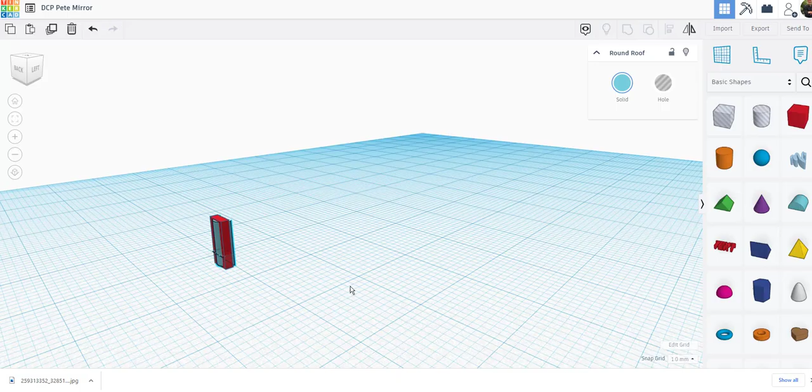What I think I'm going to do here, I'm going to take this blue object, duplicate it, and then move it out. I'm using the arrow keys on my keyboard to move that object. Then what I'm going to do is turn this blue object into a hole.

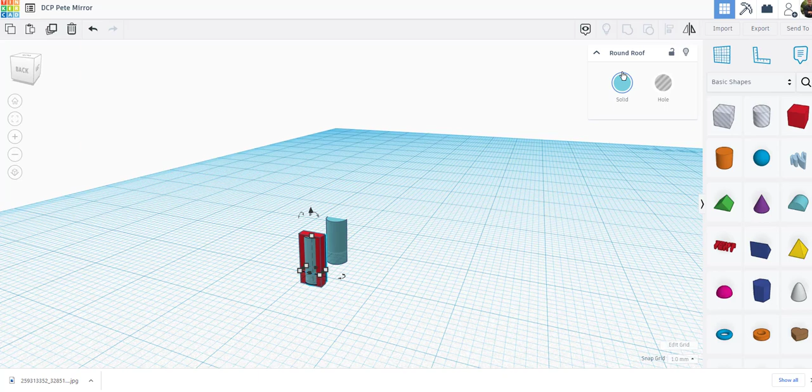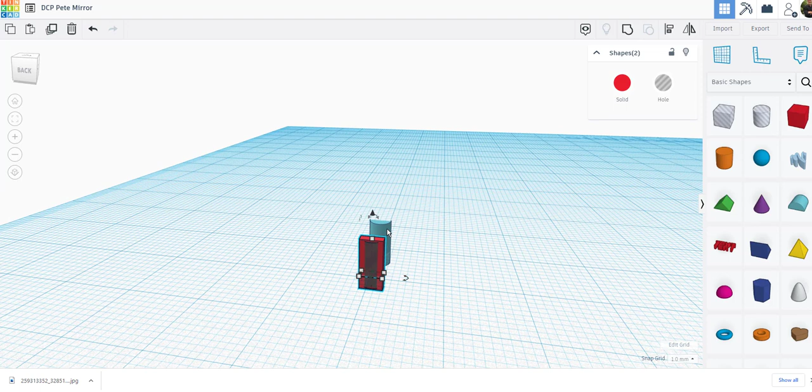Now why would I do that? The way you delete spaces on objects is to turn another object into a hole and then join them together. So we have this hollow part now, which is the hole, which is the copy of the blue object. Now I'm just going to group these two together, and see, now you can see through this.

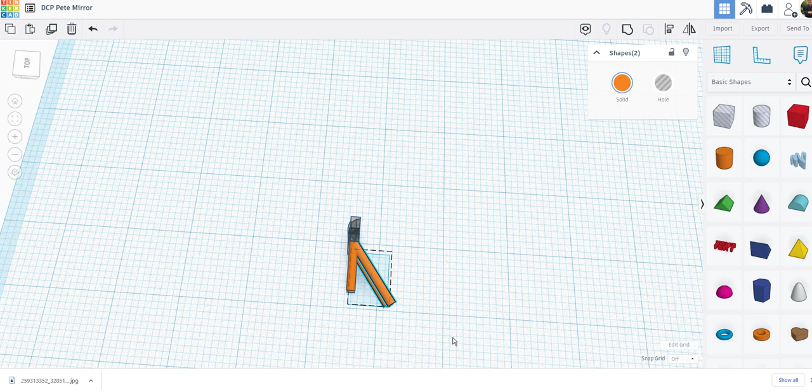On the real model, there should be approximately 6.3 millimeters between the end of this attachment point and the end of this one. At this second, I don't think we have that. We can actually pull a ruler out to the plane.

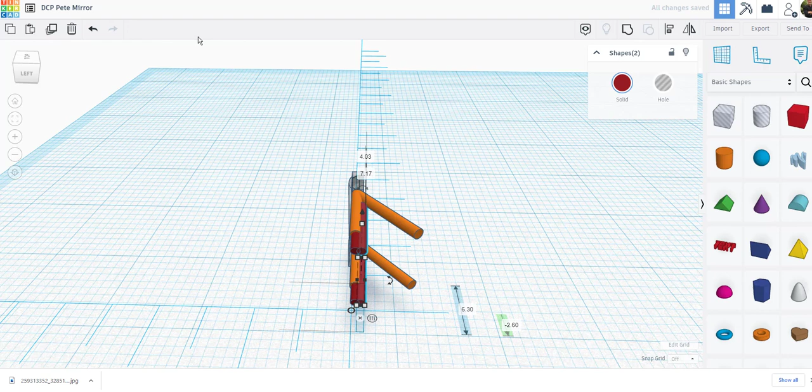Now what I'm going to do is copy these two objects again, and we're just going to move these over here to this one. And we'll turn our snap grid off. Let's turn it to 0.5.

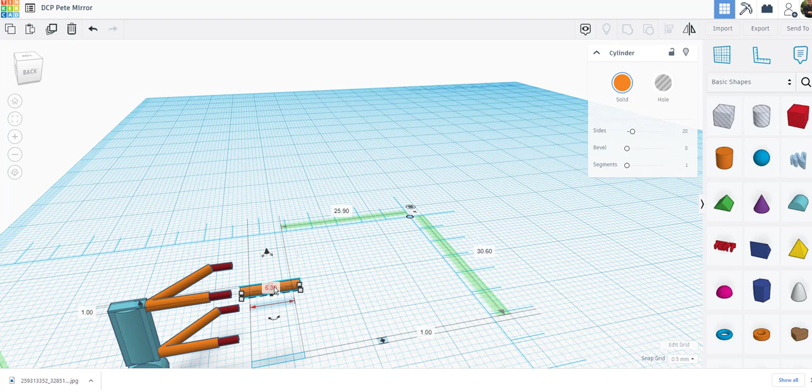Now we're going to shorten them up. Let's make this 9 again. And then we're going to turn it 45. Let's see what we get here. Okay, we're going to turn that.

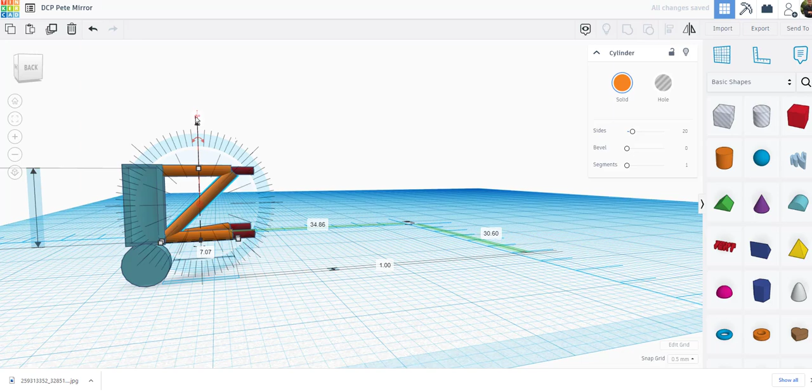For demonstration purposes, I'll go ahead and show you how I would do the rest of this. I may not leave it like this. How many do we have? 1, 2, 3, 4, 5, 6, 7, 8, 9, 10. Perfect.

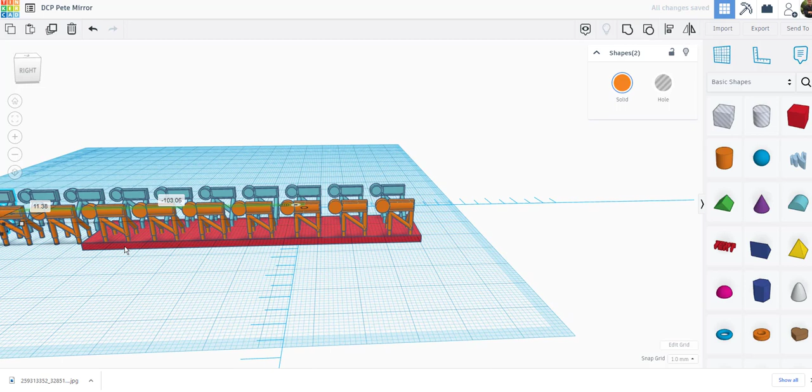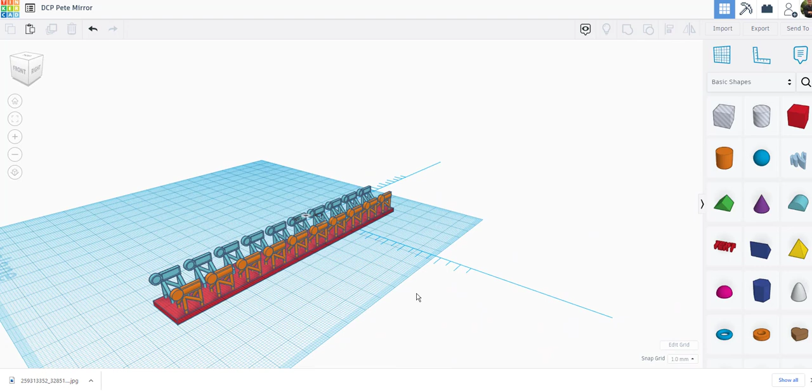And we'll make that just a little wider yet. Let's do 140. And that's it. So now we have 10 sets that we can print all at one time, and we just cut them away from this wire and they should be good to go.

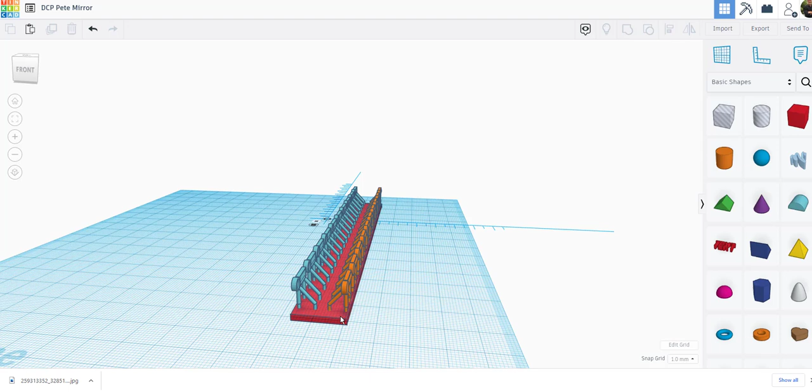As I just mentioned, I may not leave them exactly the way you see them. I might change up how I have these wired together, just to be more efficient with the design and make it simple to take off this wire and get really good results. So we'll see how it goes. Anyways, this is one way you can draw up a replacement part for your 1/64 scale vehicles.